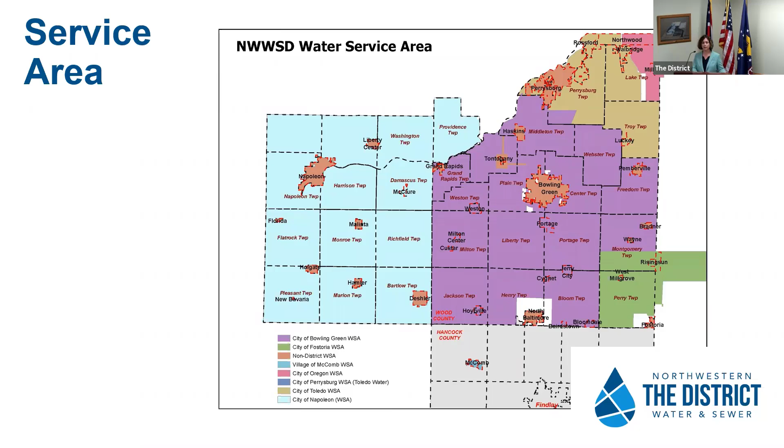We are now showing a visual map of our water service area. This area mirrors our sewer service area in most cases, and we are currently serving the majority of our area in Wood County. We serve over 20,000 customers in Wood and Henry counties as well. And with that, we will now turn the presentation over to Mr. Garrett Chamberlain.

Thank you, Teresa. As you said, I'm Garrett Chamberlain. I'm the assistant engineer here at the district. So the next slide here is critical home sewage treatment area. And what does that mean? Sorry. The unincorporated area of Sugar Ridge is considered a critical home sewage treatment area. So what that means is the Ohio EPA or the Ohio Health or Wood County Health Department has determined that the sanitary sewer conditions of the designated area are in dire need of remediation.

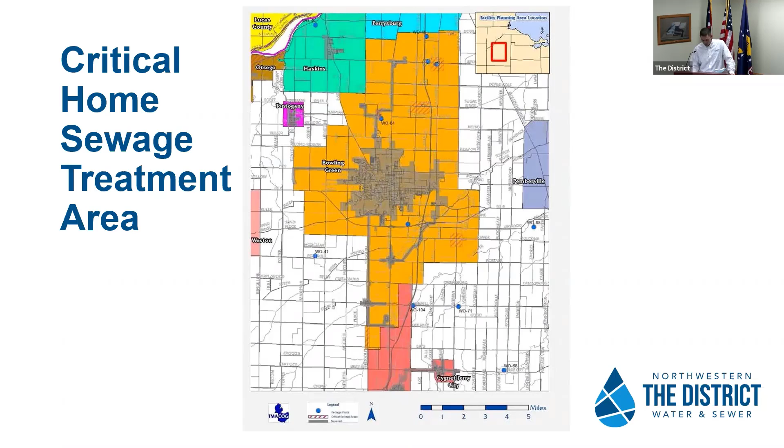So in the case of Sugar Ridge, the Ohio EPA ordered that the immediate drainage area of the community be studied, and based on the results of that study, action has to be taken to resolve the unsanitary sewer conditions. The orders from the Ohio EPA are directed to the jurisdictional body responsible for the sanitary sewer services in that designated area. And in the case of Sugar Ridge, the district is the responsible agency for providing those services. So the study was completed and the results showed that the most viable alternative was a public collection system made of low pressure sewers and grinder pumps connected to the City of Bowling Green's collections and wastewater treatment facility.

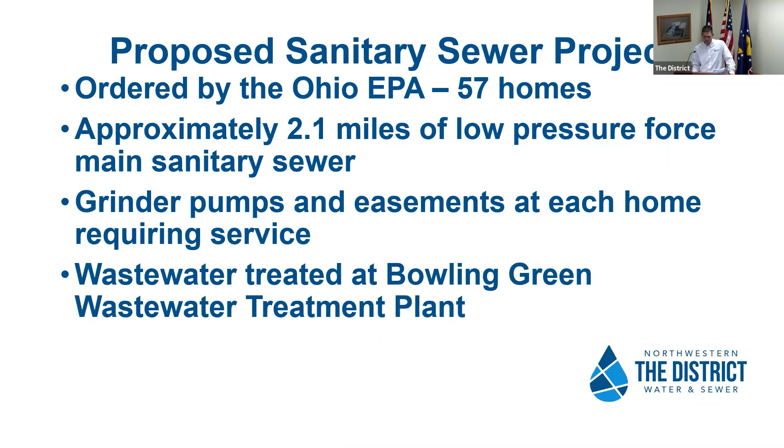I wasn't done, you can go back.

So the proposed project includes 57 homes that were identified by the Ohio EPA. The sewer collection system includes approximately 2 miles of low pressure sanitary sewer force main. Each home will receive a grinder pump for service and will be owned and maintained by the district.

Did I already say all that? So I can repeat myself. So the green lines, go back. I'm not done with that slide.

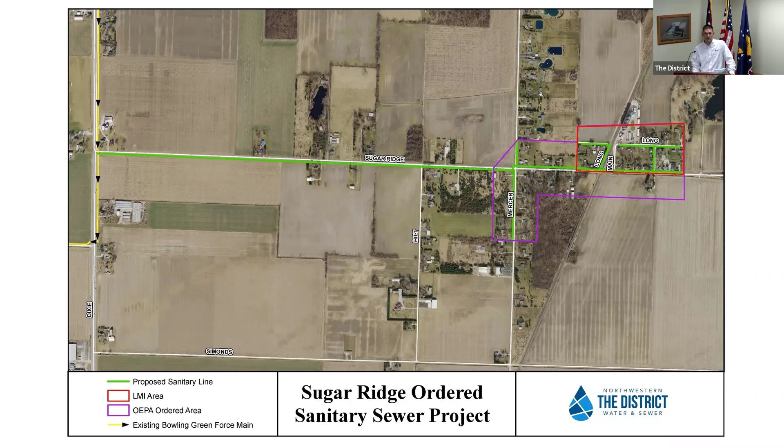The map's available on our website if you'd like to see it after the meeting or can't see it today via phone. Now you go to the next slide.

So the Ohio EPA ordered area: if you live outside that current described area, connections are currently not available as part of this project, besides those on Sugar Ridge Road. So if you live on Sugar Ridge Road to the west of Mercer, technically you were not in the ordered area, but you will be required to connect per the Wood County Health Department rules that state that anyone within 400 feet of a publicly available sewer will be required to connect.

Anyone also that lives outside the current proposed project will be offered the opportunity to petition to have the sewer lines extended to your property. We'll send letters to nearby area residents describing this process. Upon receipt of those requests for service, the district will review them and prepare estimates for all the interested properties. There's no obligation to proceed if you simply express interest, but if enough interest is received and the extension proceeds, all of the homes adjacent to the proposed sewer may be required to connect.

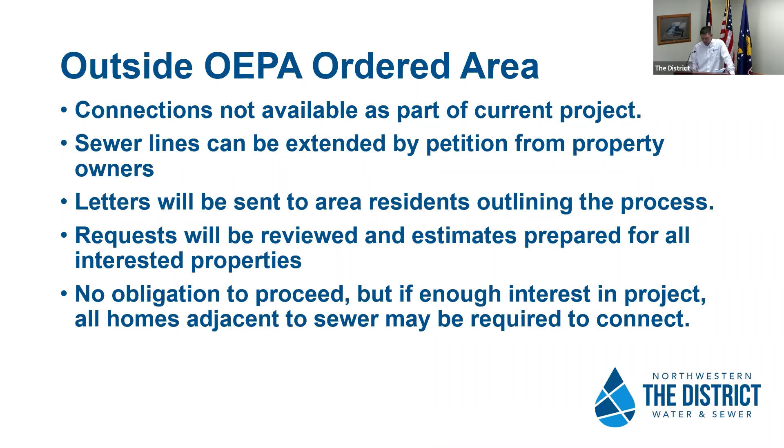All right, next slide. So this next slide is a map of the greater surrounding area to put it in perspective for those that are residing outside of the current proposed project. Available areas that could potentially have extensions include homes on Hilt Road, further south on Mercer Road, possibly all the way to Simonds Road, and then further north on Mercer Road to potentially include an extension west on Cross Creek Road. So like I said, if you live in those areas and are interested in sewer, please contact us after this meeting.

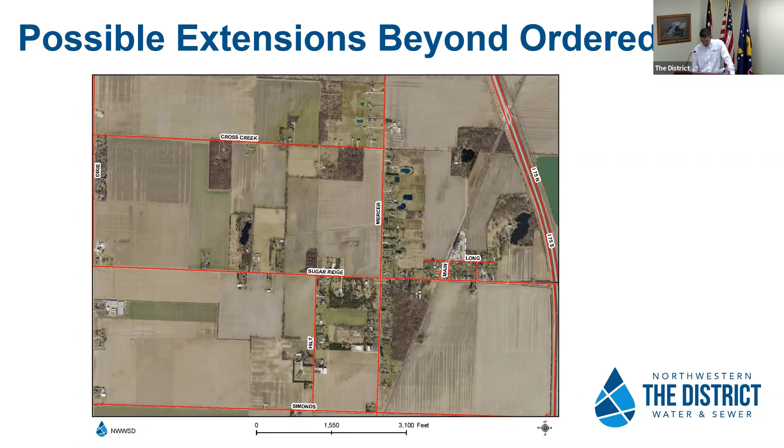So project financial assistance. Many of you probably recall that the project has been discussed multiple times in the past. That was the case because upon completion of the aforementioned studies, the project in itself was deemed to be not affordable. There simply aren't enough properties to cover the cost of constructing the system and provide a reasonable monthly debt charge. Up until now. We now resolve this issue by seeking 2 funding sources that make the project affordable, and those are listed on the slide.

One is the U.S. Army Corps of Engineers Section 594 program, which is planned to provide $919,000 in grant money, which has currently been secured and is available for the project. Another funding source we're seeking is the Ohio Community Development Block Grant, or CDBG, through their Residential Public Infrastructure Program, also known as RPIG. We've applied for this funding and are pending approval in the next funding cycle.

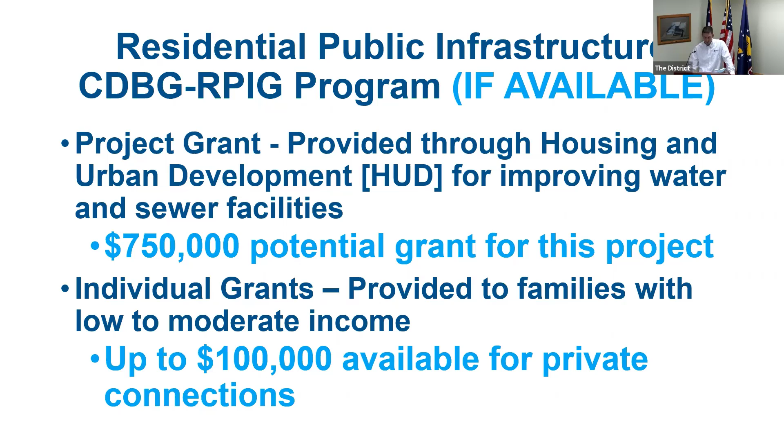The CDBG-RPIG program, if we find it available, will cover a cost of the project through the Housing and Urban Development Program for improving water and sewer facilities. This funding provides grants up to $750,000 for projects such as this. They also offer individual grants provided to families with low to moderate income. These funds can be in the total amount of $100,000 made available for private connections, which we will discuss further in another slide.

So the estimated project cost for the whole project for the low pressure sewer system as currently designed is $1.56 million. The reason that we've selected the low pressure sewer system is due to high rock elevations, flat landscape, proximity to existing sewer systems, the reliability and feasibility of maintenance for this type of system, and the district is quite familiar with such. We currently serve over 600 customers with this type of system.

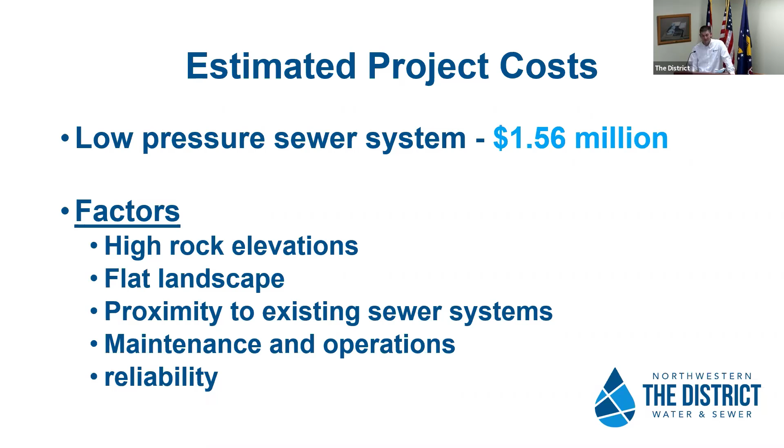The last remaining item on the schedule that needs to be done is a resolution of necessity by our Board of Trustees, which will be passed likely early next year, and that deems that the project is now affordable and will be proceeding.

So estimated construction schedule: besides the funding schedule, the design for the project is complete. Property easements for the mainline construction are complete as well, but we'll be in contact with you about easements for the grinder pump locations, which will occur in January to April as listed on this slide. Construction bidding is anticipated to be around the June to August timeframe of next year, and construction will likely start in October or potentially a little bit later in 2021. Construction completion is anticipated to be around June of 2022, so a little under a year for construction is the anticipated timeline.

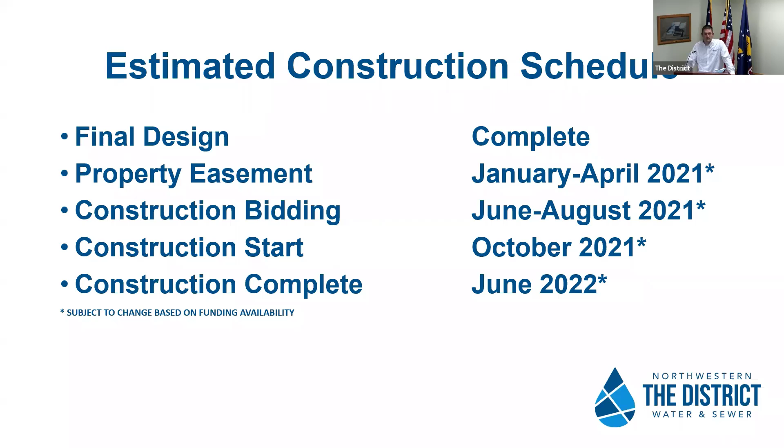So the estimated project costs, as I said, are $1.56 million. The ordered project area includes 57 homes. The estimated cost per home at that rate is $28,000 per home. The possible grant potential to cover that cost is between $16,000 and $28,000. That range is dependent on whether or not we secure the CDBG funding or simply only have the Army Corps of Engineers funding. So the total debt cost per home then ranges from $0 to $12,000 for the same reason. So the monthly cost per home would range from $0 to $26 per month for the debt service alone.

This next slide is monthly operation costs. So for those of you listening along, what does that all equate to in a monthly bill? This slide shows two different users, what we consider an average water user at 3,000 gallons per month, and also a larger than average user at 4,500 gallons per month, based on our 2020 rates, with 100% of the project covered by grant, or only part of the project covered by grant. So based on 3,000 gallons with 100% of the grant covering the project, your monthly bill, as shown in this slide, would be $46.60.

You point out most users are going to be closer to the 3,000. Correct. Most users will be closer to the 3,000. Please go back one slide. I wasn't done with that one. So, as I said, most of the users will be closer or potentially under the 3,000. In areas such as this, that's been more of our experience, but we wanted to give a larger range just in case. So the 4,500 gallons range listed there is without the CDBG grant funding. So it's significantly higher at $91.09. That's the worst case scenario, but as of right now, we don't anticipate that being the case.

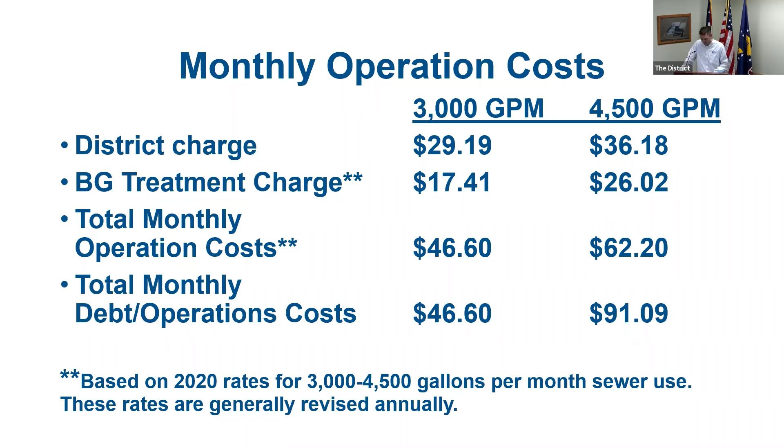All right, on the next slide, the owner's responsibility. So what exactly are you responsible for as a customer as this project is completed? Once we're completed, you'll be given notice that you have 120 days to perform the connection to the system. So this will be connecting from your home to the grinder pump that will be installed in your yard. You'll be required to use a district licensed sewer contractor, a list of which is on our website, but we can send it out to anybody that's interested. Your contractor will be responsible for abandonment of your septic tank in accordance with the Wood County Health Department rules. The contractor will be installing a new lateral or pipe from your home to the grinder pump, and the grinder pump will be located in an agreed upon location to try and minimize the additional cost of connecting to the system.

You will also be required to disconnect any stormwater, sump pumps, downspouts, or anything of that nature from the sewer lateral if it exists today. That excess water is actually a hindrance. It costs additional money for treatment and can damage the pump or wear it out prematurely. So we do require that any non-sanitary sewer flows be removed from the system. So that's the major gist of the project. Stephanie Kiefer is going to talk about potential grant funding.

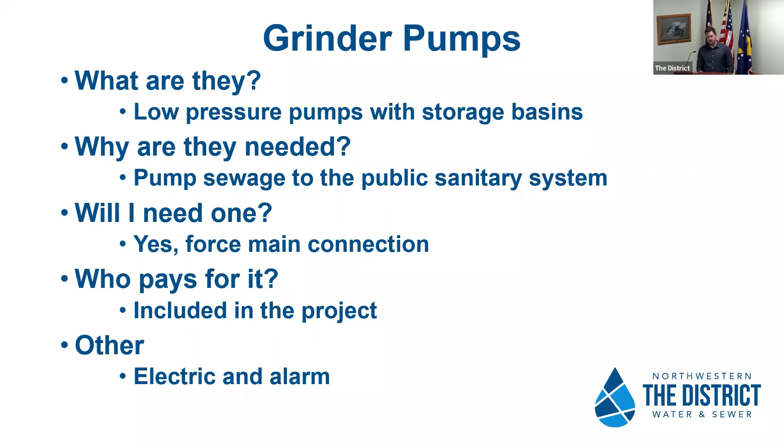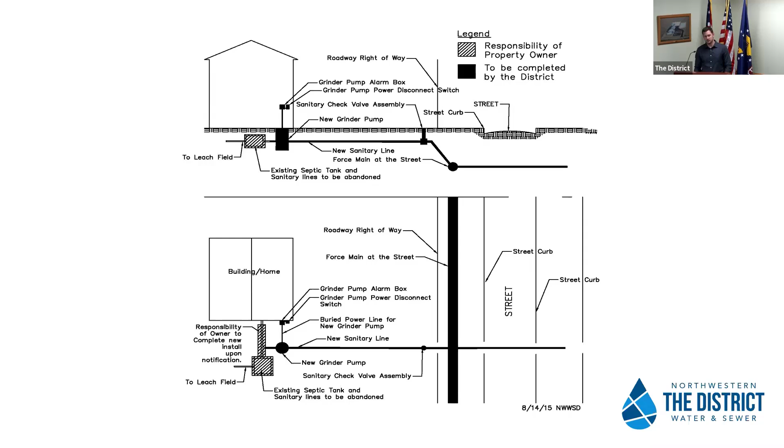This is a little diagram of the typical layout for this. It shows you got your grinder pump, alarm box, and the power disconnect switch up on the house. You have your grinder pump, and it shows where your septic tank would be, where you need to reconnect it into your grinder pump. The main itself is out in the right of way, so we'll have a 1.5 inch service line from the main to the grinder pump. And then near the right of way, you'll also have a shut off with a check valve assembly there as well.

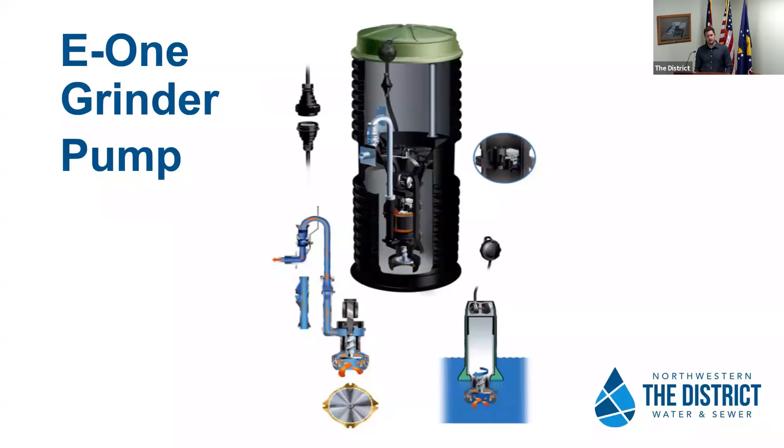This is just a little illustration of what one of these grinder pumps looks like. At the bottom there, you got the storage basin, and then inside of that is the pump itself, with a 1.5 inch discharge. All right, so these are actual pictures. The one on the left is a project with the grinder pumps before they're installed in the ground. And then the picture on the right shows the pump after the installation. All you will see is the lid. We do have fake rocks that you can set over those to kind of decorate that area and cover that up a little bit.

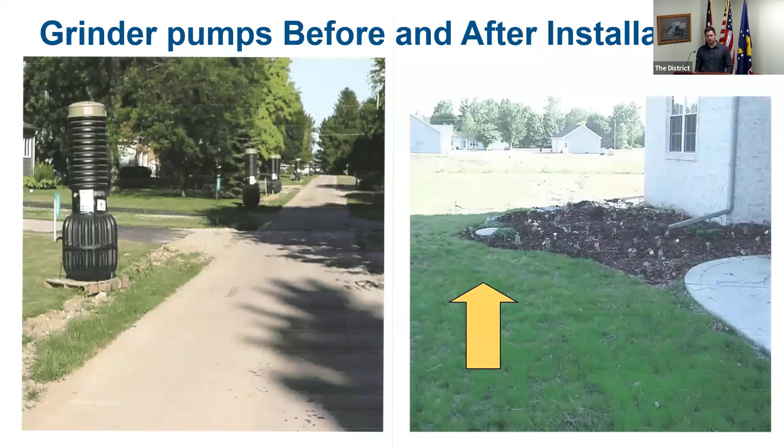Easements. So we have 4 mainline easements. Those don't apply to everyone. We have 4 of them, and if you haven't heard about that, then this won't apply to you. All those have been taken care of already. The main line itself is for the most part within the right of way, except for those 4 instances.

The individual grinder pumps will need a 10-foot by 10-foot easement per homeowner, and for those locations we'll meet with each one individually. Each case will be a little bit different, but we'll meet with each person individually and determine the best location for that. And temporary easements, I don't think we have any of those on this. This is for construction only. Nothing will be permanently installed within the temporary easements.

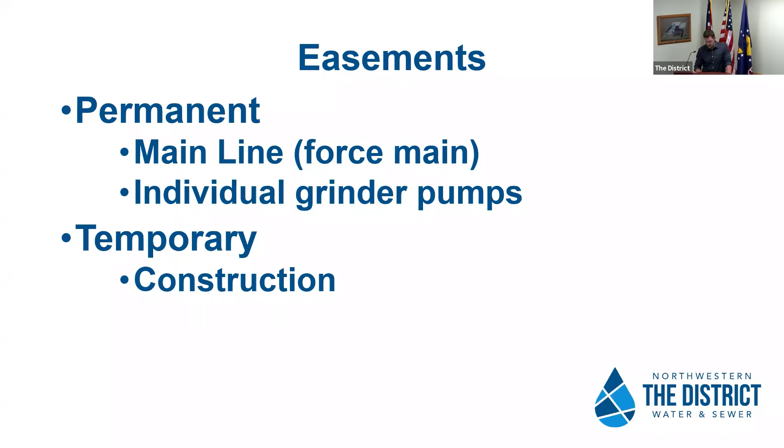I do have some questions I'd like to cover that were already emailed to me today. I'm sure a lot of you will have similar questions. First question, how will the location of the grinder pump be determined? Like I said, we'll meet with each homeowner individually. Factors to consider would be where your existing plumbing is, where it's coming out from the house. Obviously, you want the shortest run as possible to help reduce cost. And we would also want to keep that within a reasonable distance from the driveway, just in case we ever should need to access that in the future.

Second question was, what requirements does the district have regarding grinder pump station location? Again, we would just try to find something with reasonable access off of your driveway. We also would need a line of sight from the grinder pump to the alarm box. And then also we want to be able to see the alarm box from the street. And third question, does the grinder pump station need to be visible from the public road? The grinder pump itself does not, but we would need the alarm box to be visible from the road.

Fourth question was, are grinder pump stations remotely monitored? And that answer is no. The alarm box has a red light on it. If the red light comes on, the reason you want to be able to see it from the road is that somebody can call it in. And then if there's an issue, we'll come out and handle that. We have staff on hand 24/7 that can make any repairs necessary, and we have parts here at the shop that are ready to go to make any repairs.